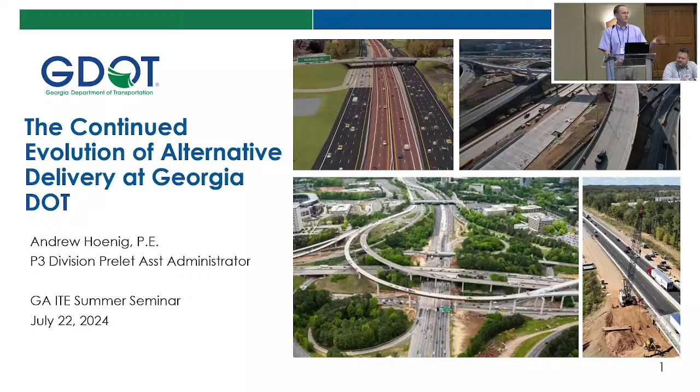But really, so it's time to start looking at what we have coming up after that, right? About after Major Mobility, we obviously have Top End still to go, which is a huge project, don't get me wrong, but it is time to start looking at what's next and what's coming after that. So that's what I'm going to talk to you guys about a little bit today.

Again, what we have coming in alternative delivery and where we are now. We just did a little bit of that. So again, I don't want to talk about where we're going before talking about where we've been.

It is really exciting how much we've been able to do via design build and via alternative delivery. So 55 design build projects totaling more than $2 billion is a really great achievement. Our commissioner actually gave a presentation to the board last week, and in part of that presentation he mentioned that Illinois DOT just recently passed design build legislation. So it's crazy to think that some other state DOTs haven't even done their first design build project, let alone CMGC or design build finance.

We've been doing design build since 2008, when we did our first project via design build - that was the Keys Interchange. So 16 years of history delivering DB and $2 billion in projects. That $2 billion figure does not include design build finance, so it does not include the 285-400 project or the Northwest Corridor project. So really you could say it's even more than that $2 billion figure by now.

And then in 2024, just this year alone, we're expected to award about $5 billion of P3 division projects. We have the West Interchange project coming out, which is 285 and 20 on the west end - that's a huge project that'll get selected in August. And then the 400 Express Lanes project also to be selected in August. So those obviously make up a majority of that $5 billion.

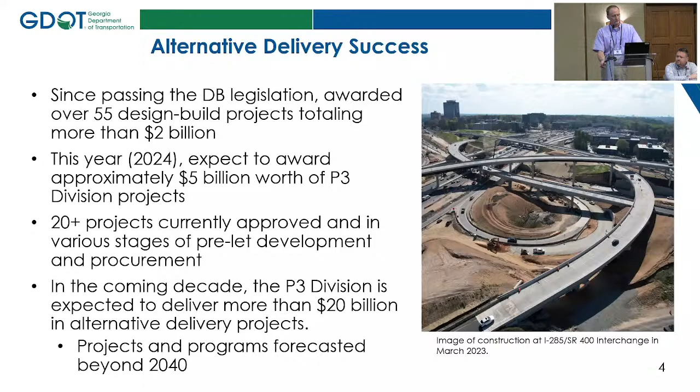So I get this question a lot about what types of alternative delivery projects are coming down the pipe. These are the types of projects we've delivered in the past. In Georgia, we really do design build for all variety of sizes and types of projects.

We've done a maintenance project on I-20 for lighting, about a $1 million lighting project. We've done Safe Routes to Schools projects via design build. So you take that as the small scale, and then we've gone all the way up to design build finance projects.

I think the niche or the projects most well fit for design build is the interchange improvement projects. Those are $100 million projects where you have interstate or limited access facilities, bridges over the interstates or ramps, things that really benefit from more innovation.

The interstate widening project has been really successful to do design build on. The first one was the Forsyth County project where they passed a referendum for $200 million, and we were able to use $63 million of that to deliver 13 miles of widening on 400.

Since that was a really big success, we actually did a variable scope on that project where we had a set dollar figure, and we told the contractors to go as far as you can, get as much widened. We were able to widen 13 miles with that $63 million.

Since that time, we've done a lot of other interstate widening projects. I-85 is a really good example, I-85 phase 1, 2, and 3 via design build.

So Ms. Purcell talked about the $1.5 billion of funding that we just got via the governor's office. That's in addition to our transportation budget, so that's really exciting for the DOT to be able to use some of that money.

So those are the types of projects that we've worked on. I do want to talk about the kind of delivery models that we've used, and new news in that realm.

Initially, the industry was more comfortable with a low bid environment. That's what they'd always done. But more recently, we've been able to do best value projects, and that's really shown a benefit in terms of schedule, aesthetics, or working with local communities. There's lots of other ways to get value out of a project besides low bid.

But the more recent legislation we got approved was the alternative contracting method, the ACM projects, and that was split into 3 categories: CMGC, Preliminary Development Agreement, and Comprehensive Development Agreement. Has everybody heard of CMGC? Do you know what that is? I don't need to explain.

Okay, good, I got a bunch of head nods, so I'll assume yes. So we did award our first CMGC project. Real excited that Ms. Purcell talked about the raising of the Talmadge Bridge in Savannah. That's going really well. It's really cool to see the coordination between the consultant and the contractor working together with a common solution before you even have a construction bid authorized, but those entities working together come up with the best solution.

One thing I do want to be clear on, ACM legislation is very limited in Georgia. Right now it's 7 projects over a 10-year time frame. So we don't anticipate using ACM for too many projects, but it is a tool in the toolbox when you have a complicated situation, like raising the Talmadge Bridge, that had never been done before. It's a good opportunity to use CMGC.

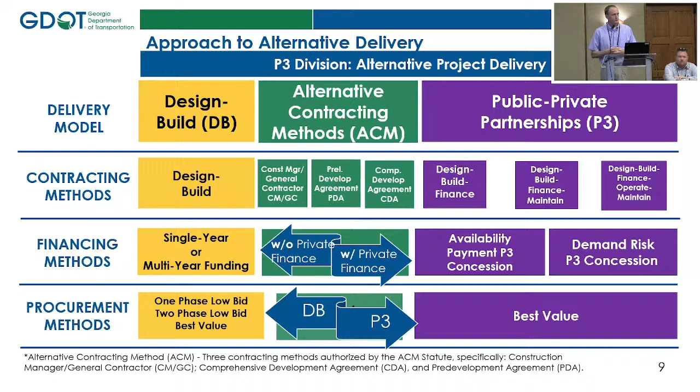So I wanted to show you the new reorganization. I've gotten questions today about what our changes are, because I used to be on the construction side of things. I've now moved to the pre-let side of things, so I'm the pre-let assistant administrator. Real excited about the opportunity to be back on the pre-let side. But besides where I am now, it's really a growth of our division.

For example, Kelvin Mullins was the District 1 engineer. I see Jason Dykes was in the room, so, because Kelvin came to our division. But on top of Kelvin, we also have Helen Pinkston Pope. She was in GDOT Legal, and we coordinate with her a lot. She was kind of our #1 SME in the legal office. Now she's in our division.

And similarly with Michelle Pate, she was in design policy and support, and she's now been brought over to our division. We're really growing our division, and this is intentional, to get more GDOT engaged leadership on these projects. I'll highlight the post-let side of things, because Kelvin is also hiring more project managers to work in the post-let side, to really grow that engaged GDOT leadership in the post-let environment. We had gotten to the point where we couldn't manage all the projects with the small amount of people we had, so we're really growing the division and being more focused on projects.

And then Chandri Brown is also joining our division. She was in program delivery, the Office of Program Delivery, so now she's my counterpart on the pre-let side of things.

And the other thing I wanted to touch on today, did everybody know that we did a design build finance survey? Show of hands. I know some of you, I work with all of y'all. That's good.

We did do a design build finance survey recently. I think it went out in April, and the deadline was June. We were really trying to get feedback from the industry about what we're doing right and how we can be more efficient. We sent that out through ACEC and through Georgia Highway Contractors Association and got a lot of great feedback. We really do value the feedback we receive from the industry. If you ever have anything that is not going well on a design build finance or design build project, feel free to reach out.

So I wanted to talk a little bit about the survey results we got, because it is good feedback. We received 40 individual responses from the industry, varied from consultants and contractors, varied in terms of experienced and non-experienced. I was pretty happy with the 40, and I was really happy with that being the number of people that responded, not the responses themselves, so they varied all over the place.

They were focused on sort of six areas that I'll touch on: streamline procurement approach and evaluation criteria. I touched on the best value selection criteria, but it was really good to see the industry has really grown in Georgia, grown from a low bid approach to a best value approach. A lot of the feedback we got was to increase the evaluation criteria, increase the scoring on the technical side of things, rather than the price. That was really good feedback to have.

And then upcoming opportunities. I mentioned the 400 Express Lane and the I-285 West Interchange project. Those are the DBF projects hopefully selected in August and then awarded later this year. Broadband OMC I touched on, NEVI that Christina will touch on, and then I-75 CVL is the next MMIP project still in the works to be delivered.

Christina has served at the Georgia Department of Transportation for 11 years and is currently the Assistant State Traffic Engineer. She manages GDOT's active traffic management components for Georgia's freeways, including TMC operations and the ITS infrastructure. She previously served as the District 6 Traffic Engineer, as said earlier. She graduated from Georgia Tech with a bachelor's and master's degree in civil engineering. Christina.

So like Andrew said, I will be presenting on Georgia's National Electric Vehicle Infrastructure Deployment Program. This goes through the agenda we're going to talk about. We'll give an overview of the program, talk about our contracting approach. We have 2 rounds of procurement we've done so far or that we're working on, so I'll talk about those, and then we'll talk about some project resources you can access for round 2.

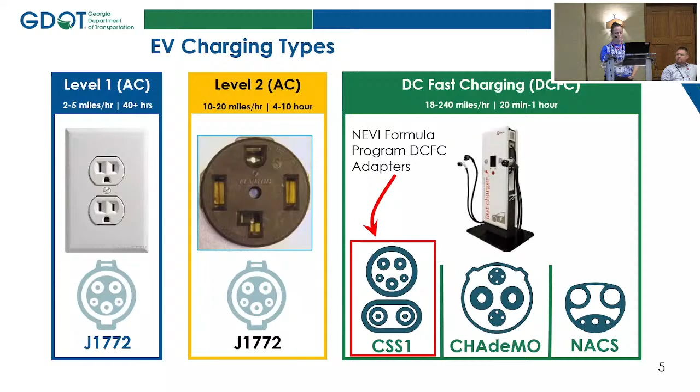So just to go through some more of the requirements for the projects themselves: it's an 80-20 split of federal funding. The federal funding covers 80% of the project, and then the developer covers the rest of the cost of the project.

The chargers are required to have a 97% uptime, and they have to be available 24/7. Essentially, when people stop to charge, we want them to be able to charge. We don't want a situation in which you stop at a convenient location along your route and it's broken - that wouldn't do any good. So there are requirements for availability.

As far as location, they have to be located every 50 miles along an AFC, and they have to be located less than a mile from the corridor. I'll show you a map of the AFCs a little bit later in this presentation, but for the purposes of Georgia, it's mainly interstates and then a few state routes. So if you're traveling along that route, you don't have to drive 5 miles to charge your car - it'll be within a mile of the corridor.

I've gotten some questions previously - there are some other requirements for location. So if at the end of a corridor, you have to have a charger located within 25 miles of the end of the corridor. If the end of the corridor is in your state, it's got to be within 25 miles of that. If it crosses state lines, then it needs to be within 25 miles of the border if the adjacent state does not have that same AFC. If they do, then you just have to meet the 50 miles between the charger and your state versus the next state. That has actually made a bit of a difference to us, because we had to increase the number of chargers we were going to build with round 2 just to make sure we were meeting all those requirements.

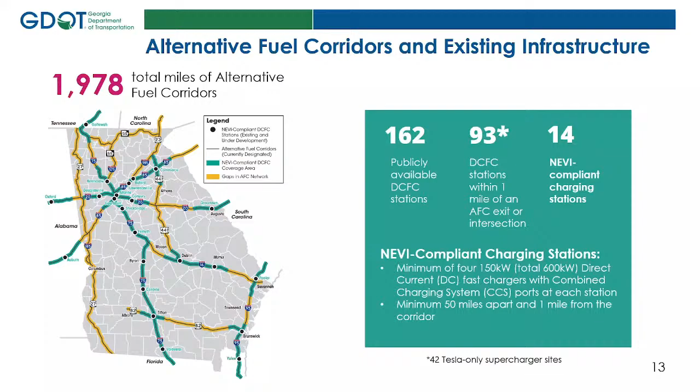Additionally, there are also 42 Tesla-only supercharger sites, but again, to be NEVI compliant, you have to have CCS connectors. So if it's a Tesla-only supercharger site, it would not be considered NEVI compliant.

For locations across the AFCs, we looked at different things: traffic as a proxy for potential charger utilization, connections to major cross highways, tourist destinations along the route, is this somewhere people already stop, existing real estate around the interchanges. And then another thing we looked at in the proposals was amenities, including planned and existing additions.

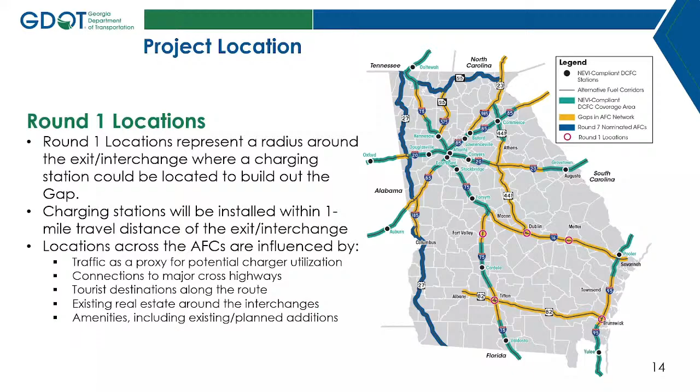So, did they have Wi-Fi? Were there places within walking distance? Were there restrooms? Different things like that played into the selection process.

So for round 1, we have selected the 5 best value proposers. You can see them on the site. EnviroSpark has a location in Tifton and Metter, and then we have Francis Energy in Fort Valley, Silver Comet in Dublin, and then Love's Travel Stop and Country Stores in Brunswick.

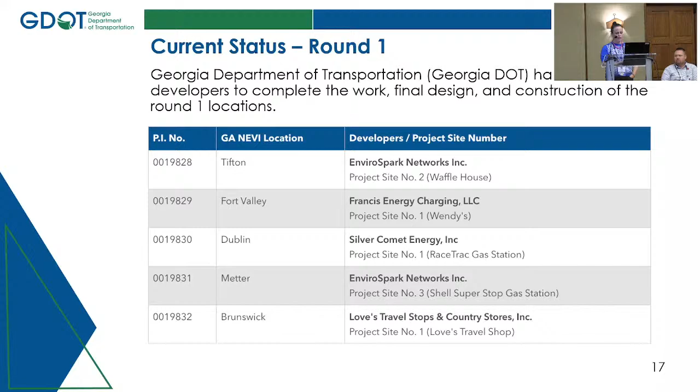I'll run through real quick these different locations. In Tifton, it'll be at a Waffle House. A canopy was another thing we looked at as a potential amenity, but there isn't one proposed here. You can also see on the map next to the aerial image there were 3 other sites proposed in Tifton, but the yellow shows what the selected site was.

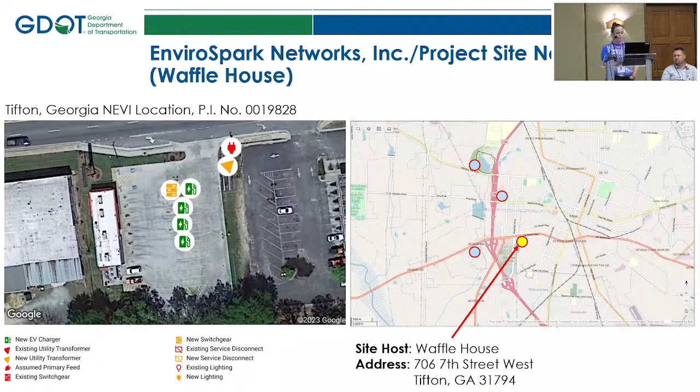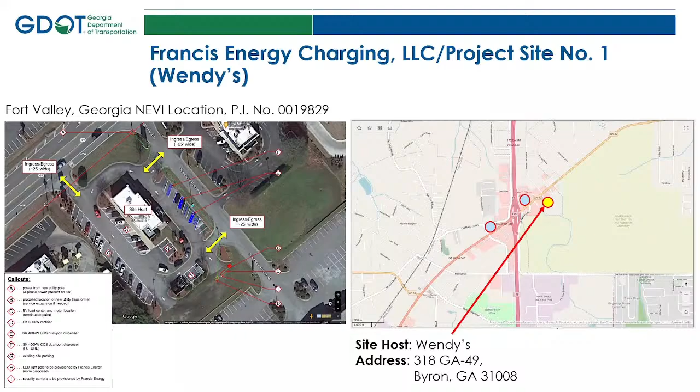Similarly, this is the Fort Valley location. It'll be at a Wendy's. There's no canopy proposed, but the proposer did note that a solar canopy could be installed in the future, so there might be a future upgrade, or there could be.

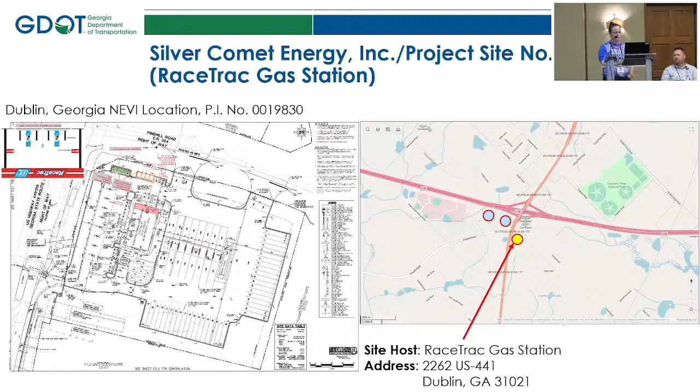This will be at a RaceTrac in Dublin, Silver Comet. They actually are proposing a canopy, and you can see that in their site layout. Unfortunately it's upside down, but you can kind of imagine what that would look like. I've seen those at RaceTracs, so traveling around you may have already seen something that looks like that, but that'll be our Dublin site.

The other EnviroSpark site is in Metter, Georgia. It'll be at the Shell Super Stop gas station, so you can stop there and charge your electric vehicle on your way to summer seminar.

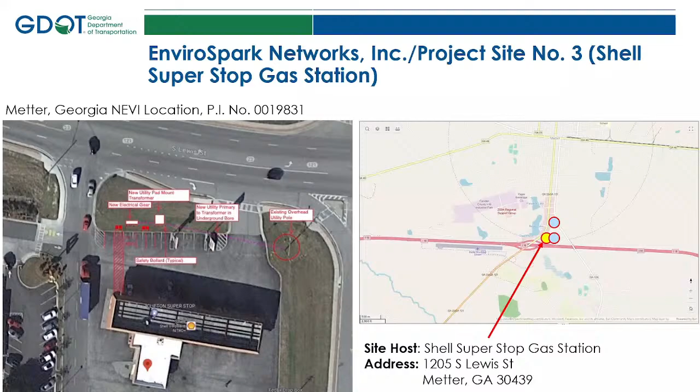And then this is the Love's Travel Stop and Country Stores, which is in Brunswick.

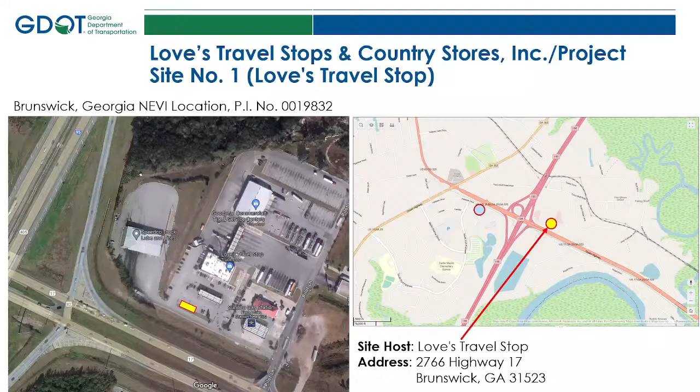And so right now we are in our round 2 procurement. We just released an RFP for that, and it's currently in procurement utilizing Bid Express.

If you want to look at the project information, you can use the QR codes. We recorded an industry forum earlier this year, so you can take a look at that. And then next to that QR code is a QR code that shows round 2 info.

Round 2 identified 33 locations, so it's a lot bigger than round 1. But round 1 was really our first, kind of let's learn some lessons, because at GDOT we've never done a project like this. We've never built electric vehicle chargers. So it was really helpful, I feel, to get some lessons learned under our belt before we went for the 33 charging locations.

This is essentially going to build out the rest of our AFCs as they stand now. Once we're done with that, we'll still have NEVI funds available. So it's potential that we could go off the AFCs, or FHWA does rounds of nominations for AFCs, so there is the potential that there could be more AFCs at some point in the future. We don't really know at this point, but for now round 2 will finish out the build of our AFCs.

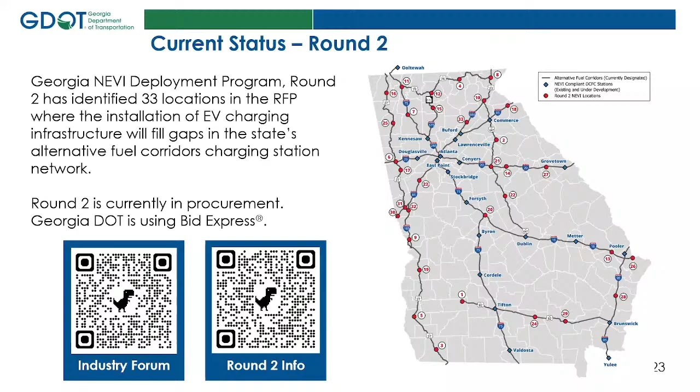We do have a mapping tool that you can look at if you want to see all the gaps that we're filling. You can use the QR code to take a look at it. It's interactive, so there's a lot of information there.

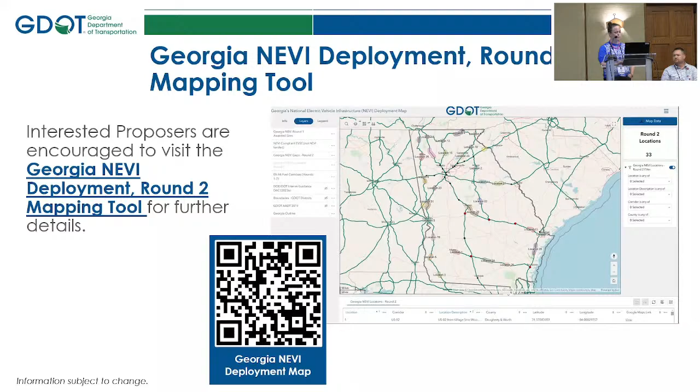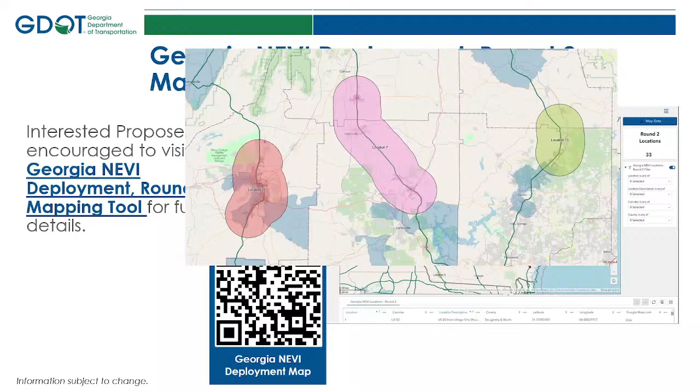This is what the map looks like if you just bring it up. You can see there's little blobs showing you what the locations are, what the gaps are. That's a big overview, but if you zoom in closer, it actually shows you a polygon, and that polygon encompasses every area within 1 mile of the AFC.

You'll notice if you go to the mapping tool, some of the locations have more than one polygon, some might only have one. It just depends what met the distance requirement for the 50 miles, and then also what was available, and then what met the 1 mile from the AFC requirement.

So how many improvements does it take to fix Short Pump? First off, what is Short Pump? It is an area in Henrico County, just outside of Richmond. The county surrounds Richmond to the east, west, and north. Short Pump is a very commercial area, and by far has the most traffic issues, most congestion in the Richmond area. Probably not going to compare to what you might see in Atlanta, but for Richmond, which is a fairly small city, to have this much of an issue just outside of it is pretty problematic.

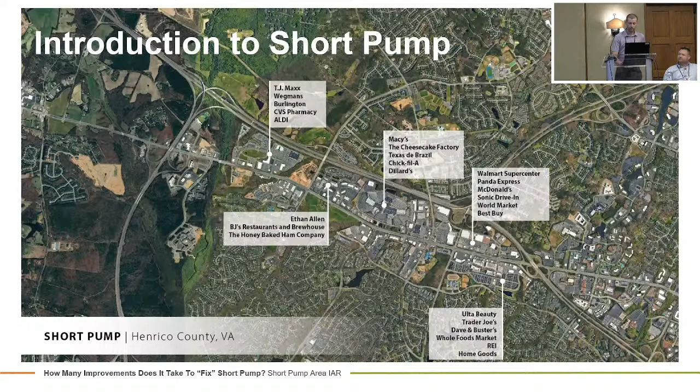One thing that's interesting about Short Pump, and to Henrico County's dismay a little bit, is that it has been studied again and again and again, and there have been fixes, small improvements identified, but nothing to really address the heart of some of the issues. So before I get started, I wanted to outline some of the other studies completed in the area, to give an outline of what's happening there too.

So you have I-64 running east to west throughout the area.

I-295 runs north-south as a bypass route around Richmond. Route 288, while not an interstate, is a freeway that essentially acts as the fourth leg of I-295. But Route 288 and I-295 don't connect, so there's a stretch of I-64 connecting those two other major freeways, and of course I-64 is carrying plenty of traffic itself.

A lot of focus has been placed on the arterial, US 250 throughout the short pump area, which serves all of the businesses I had listed on the previous slide. But there hasn't really been a study in recent years that identified fixes to the problems happening on the interstate. So that became our focus for this study.

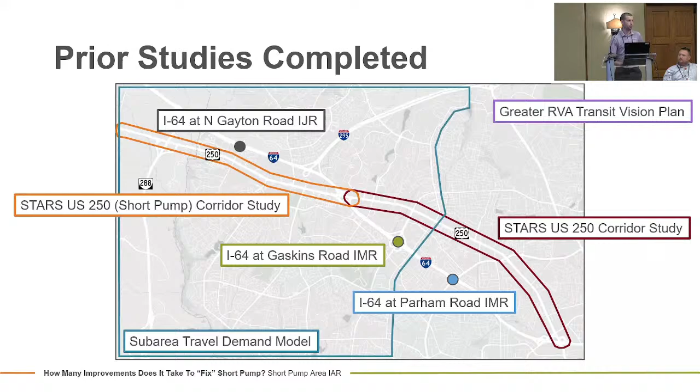This part is kind of par for the course for a lot of studies. What was our goal? We wanted to improve safety at the hot spots, reduce recurring congestion, and address some of the capacity constrained roadways in the area.

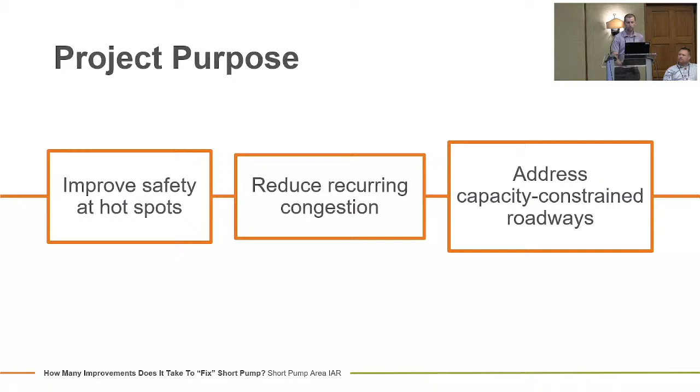One of the things that was interesting about this area is what was happening from a safety perspective. Within 5 years in the short pump area, there were almost 1,900 crashes, including 7 fatal crashes and almost 500 injury crashes. We also had data from the police department showing 9,500 calls for service in this same area, so plenty of instances that did not show up in crash data, likely due to a dollar threshold.

VDOT every year releases a network screening for the entire state that identifies intersections and segments ranked highly for potential safety improvement, which should be evaluated as part of a safety project.

All of those intersections and segments are then ranked within each district. Virginia is split into 9 districts, and short pump had the highest ranked intersection in the Richmond District, also the 9th highest ranked intersection, and 8 segments totaling 2 miles in the top 10. To put that into perspective, Richmond District is, I believe, the largest district in Virginia, with just shy of 10,000 miles of roadway analyzed as part of this network screening. Two of the top 10 in the whole district were right in this area.

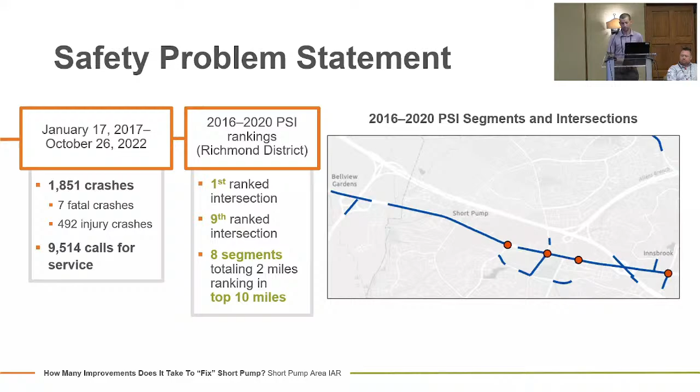A little bit more specifically about what's happening: on westbound I-64 approaching the interchange with US 250, if you're taking what we'll refer to as the westbound to westbound loop ramp to access short pump and all of these businesses, there was a pattern of rear end crashes, 155 crashes over 5 years approaching that loop ramp. Part of it was due to the amount of traffic trying to access the area, and part of it was a fairly short weave within the cloverleaf ramp.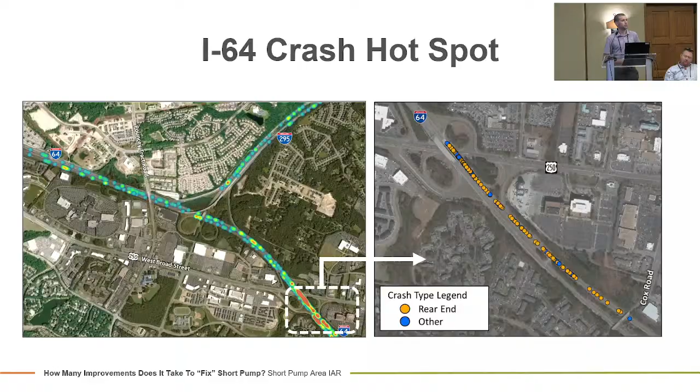But one thing that was interesting, and I'll circle back to this a little bit later, is the timing of these crashes and how densely grouped in the PM peak hour they occurred, much more so than what you would see on average.

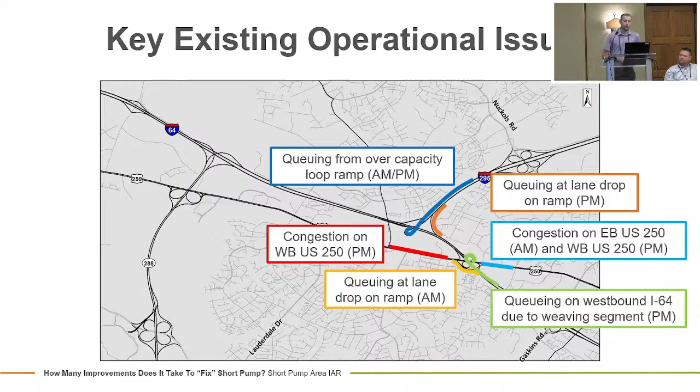In our existing operations analysis, we modeled the entire area, including all 3 freeways - Route 288, I-64, I-295 - plus the entirety of US 250 in between. There were a couple major issues today that were all centered towards the eastern half of our study area.

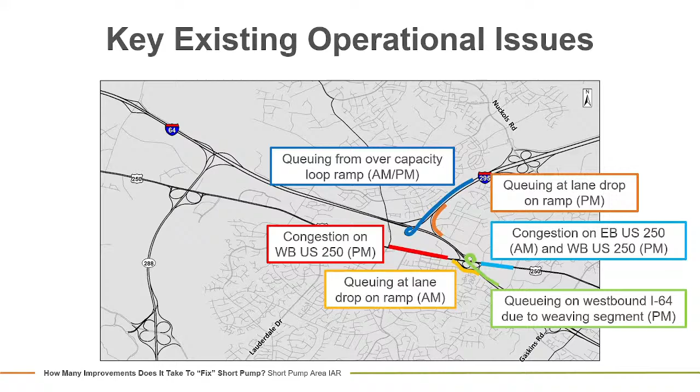Most notably being that queue centered on that westbound 64 to westbound US 250 loop ramp. When we projected that into the future, all of the existing issues just became worse, as you would expect with traffic growth. But then the western half of the study corridor also had some issues start to pop up in our future years.

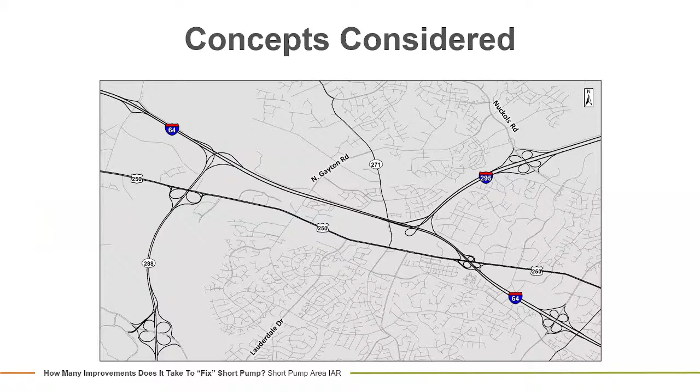So the title of this is How Many Improvements Does It Take to Fix Short Pump? Let me walk you through what we considered, first of all, starting with 3 improvements that had been identified in some of those previous studies that had been done but hadn't yet been funded or constructed. We wanted to include them as part of our efforts.

That was adding auxiliary lanes on Route 288. Part of that was then making necessary improvements on US 250 towards that western half of the corridor, and also installing a through cut, which is an innovative intersection design that has become pretty popular in Virginia, near that interchange with US 250.

So that was the start. We had those efforts pretty much worked through already. We then wanted to really focus on the interchange where we had that safety and congestion issue, so we considered a few different options for innovative interchanges, and we ended up looking at a few different ways of removing that weave and converting this to a partial cloverleaf.

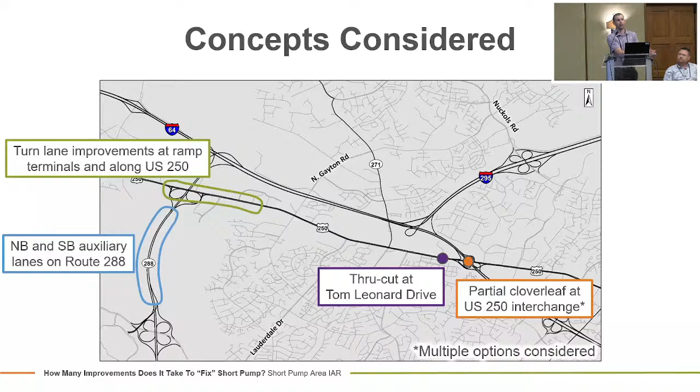However, what we noticed once we were able to free up congestion there and reduce some of that queuing, it just pushes the bottleneck downstream. So then we add in some improvements on I-295, another improvement on the arterial, now that we have volume flowing a little bit better.

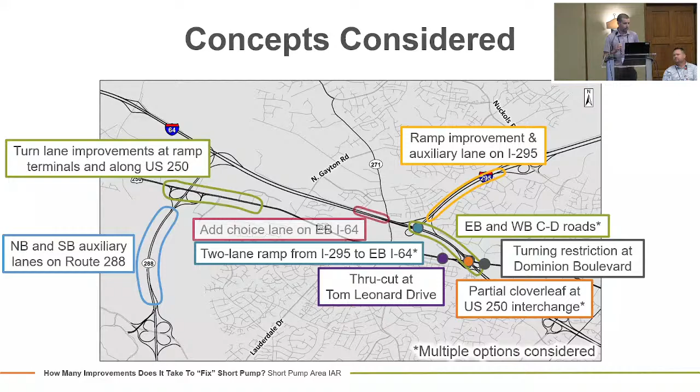Add in a few more options. VDOT and FHWA involved in the project really wanted us to look at options for CD roads. And then we also looked at ways to handle capacity issues on I-295, accessing 64 with a 2-lane ramp. And then a more minor improvement, but just restriping to add a choice lane on I-64.

What I can tell you from this, it's a fairly long list of improvements that we were considering, and these are after we ruled out some improvements earlier on. But I can tell you that it really became a scoping nightmare. For anyone trying to scope projects, we had to look at improvement A. Well, what happens about A plus B, and then A plus B plus C, and then what if we do just A and C together and take out B? So the amount of iterations that we had to run through with the analysis was pretty extensive.

One of the things that Henrico County was very interested in, and this has been in their comprehensive plan for a number of years, was they wanted to look at a new interchange. The challenge with this is they were interested in putting a new interchange between the I-64 interchange with Route 288, which is a freeway-to-freeway interchange, and the I-64 interchange with I-295. So you've got these two major freeway-to-freeway or system-to-system interchanges, and they wanted to put one in the middle.

The spacing was actually okay, but from VDOT's perspective and FHWA's perspective, their biggest worry was, well, can you do this without disrupting that flow from 288 to 295? And then our question to Henrico County is, sure, we could look at this, but we're also looking at all of these other improvements. Where's the value, and how many additional combinations of this new interchange plus these other improvements do we have to consider to be able to tell this story?

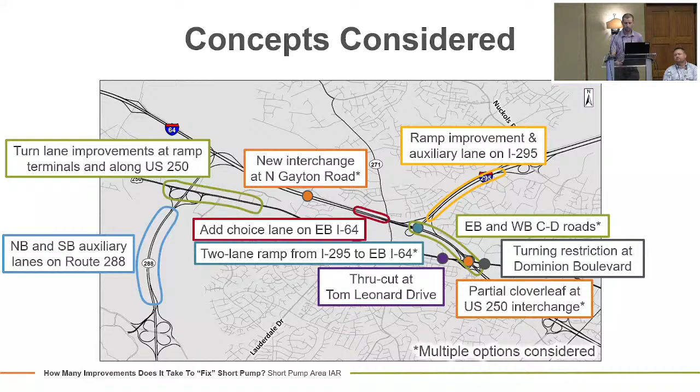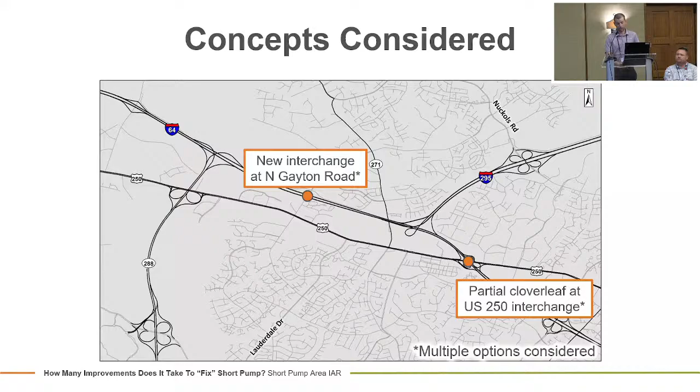So I'm going to focus on these two major improvements that we were evaluating, the partial cloverleaf and then this new interchange, for the rest of my presentation. I'll circle back to the big picture at the end.

So first, again, we looked at a few different options for this partial cloverleaf. The main motivation here was removing that weave on I-64 to try to help reduce the number of crashes that are occurring, and to just be able to push more vehicles through on I-64. So we removed the ramp from eastbound 250 to westbound 64 and instead added a signal with left turns.

When we first looked at that with a traditional partial cloverleaf design, we noticed that we then had queuing issues that were created on US 250 due to the new signal. So one of the changes that we made was to implement a contraflow left turn interchange.

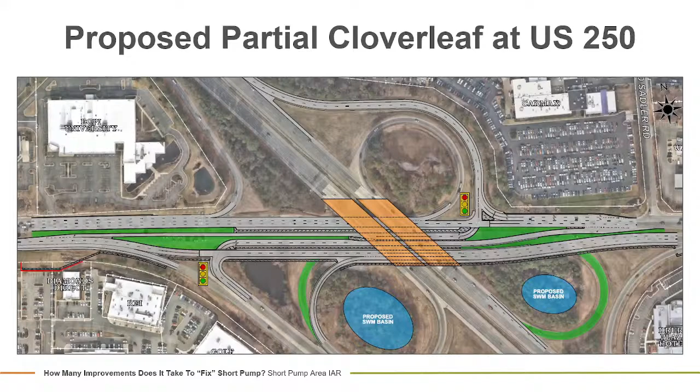So if you look in the middle of this diagram, not quite like a DDI where you don't, just the left turns are crossing. What it did was it allowed us to have more storage in the left turn lane for those vehicles accessing the new signal and turning left, where we were able to alleviate some queuing issues on US 250.

And now if I go back to the potential new interchange at North Gayton, one of the biggest motivating factors for considering this interchange was that it had potential to reroute volume away from the most capacity-constrained roadways or ramps in the area. So what we have shown is the projected change in our peak hour volumes.

So I'll start with that loop ramp that is the kind of basis for our study. In 2046, if we were to implement this new interchange, because it provided new access to Short Pump area, it was projected to take away 600 vehicles from that loop ramp that was over capacity. We were also able to take a lot of volume off of US 250 itself, which had its own safety and congestion related issues.

So the goal here was to make sure, okay, well, we know we're adding a new access point. The goal is to make sure that this area in between these three major interchanges can still operate efficiently on I-64, and can we mitigate any potential increases in congestion in that area so that we can see the benefit of reduced volume on these other roadways.

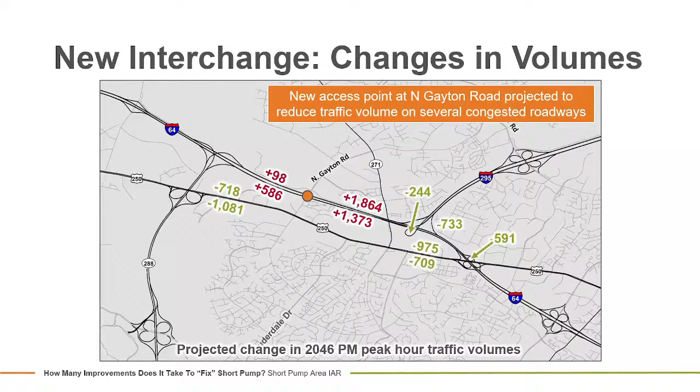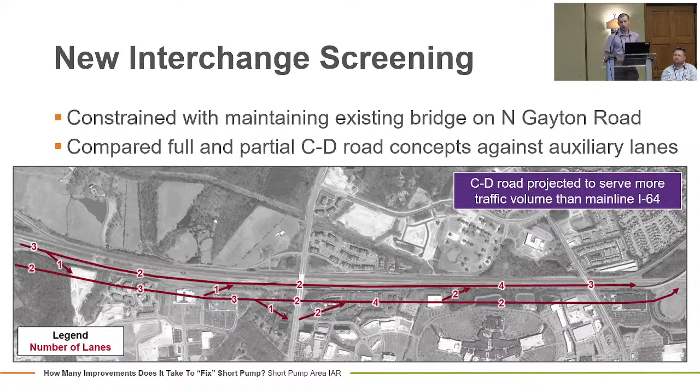I mentioned earlier that VDOT and Federal Highway were very interested in seeing concepts related to CD roads. So with the new interchange, the question was how does this fit in, and can it be a system of CD roads? The concept shown here was the least desirable from VDOT and FHWA's perspective, and this was our smallest CD road concept, where we were carrying 3 or 4 lanes throughout the CD road to accommodate traffic, since traffic going from Route 288 to I-295, or through either of those interchanges, was on the CD road.

This created some issues related to access in and out, based on the number of ingress and egress points to the CD road. On the other option we looked at, we actually needed 5 lanes on the CD road at one point to accommodate the amount of traffic it would be serving.

After a couple of redesigns of the CD road, we were able to determine that the CD road could operate as efficiently as the other option we were looking at, which was just auxiliary lanes connecting the two existing interchanges to our proposed interchange. Both operated fairly well and did not have any degradation in speed compared to our existing scenario.

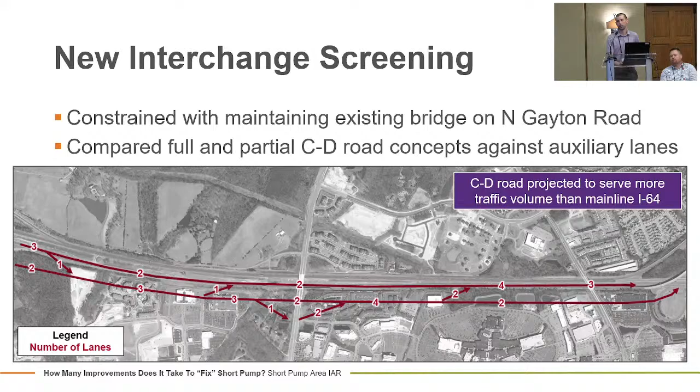So one question was, for this new interchange, how do we connect it to the two major interchanges on either side? The other was what interchange alternative to use, where Henrico's main goal was to maintain the existing bridge. So what we came up with was a DDI at North Gayton Road with those auxiliary lanes connecting this interchange again to the major interchanges on either side.

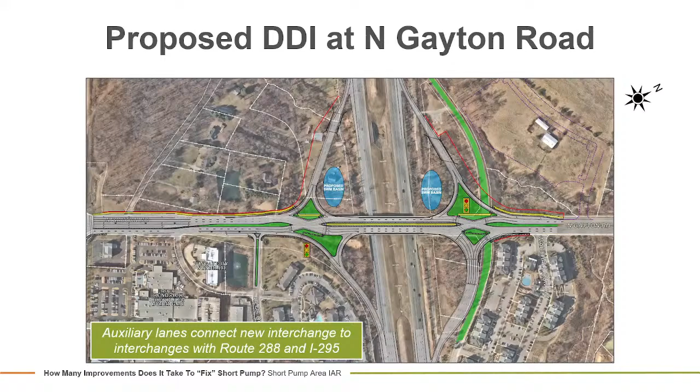To wrap this up and put it in a way we could effectively compare these various alternatives across the board, we ended up developing what we were calling build packages. So there were 3 build packages, where the major difference was: build package 1 included our cloverleaf at US 250, build package 2 included the new interchange at North Gayton Road, and build package 3 included both major improvements.

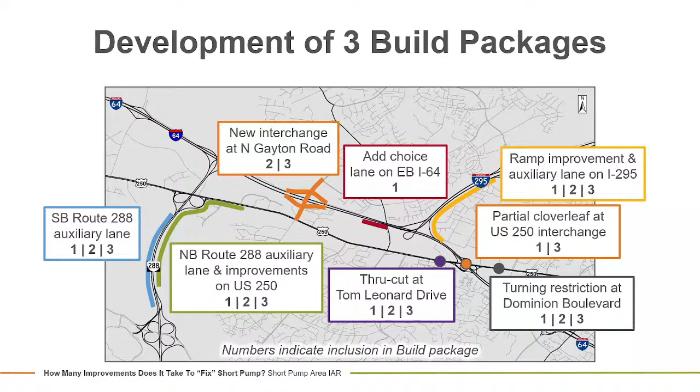The other improvements, I say minor, but when I show you costs in a bit, the minor ones really aren't so minor either. These other improvements were included in all 3 build packages, with the exception of one, which was restriping for the choice lane, which was not needed once we added the new interchange and auxiliary lanes.

So what did this do to the area? Our build packages, all 3, were projected to reduce travel time on westbound I-64 in the 2046 PM peak hour by over 15 minutes compared to our no-build scenario. All showed vast improvement over no-build, so there was plenty of utility. But we found that build packages 2 and 3, which included the new interchange, improved travel time even more, because so many more vehicles were now through vehicles at that interchange with I-64 or US 250, as opposed to exiting and being caught in that weave.

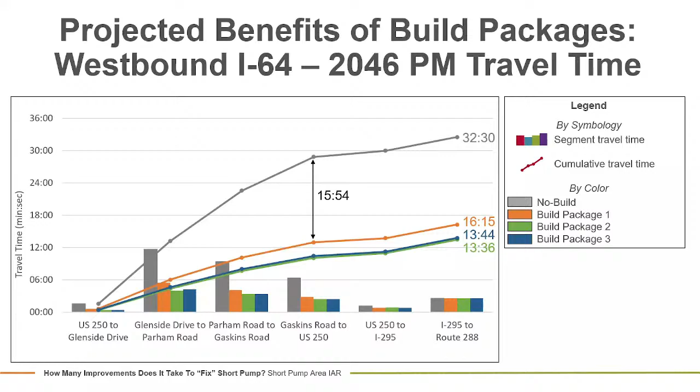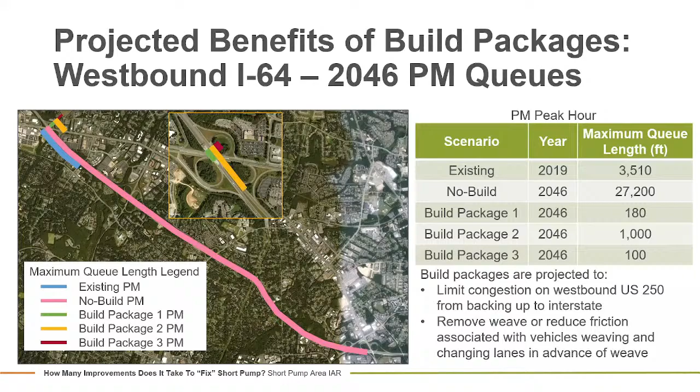What will be the only real technical part of this presentation is our biggest challenge, which was trying to document the potential benefits to safety. I don't know who here has worked on predictive analyses with Highway Safety Manual-based methods, but I will be the first to tell you I cannot wait for the new version of the Highway Safety Manual.

Because every project I've worked on using predictive methods for interstates, there's always some limitation where it can't truly analyze the scenario you're working on. Our goal, specifically with the packages that included the new interchange, was to identify the potential increase in crashes predicted due to new signals, new ramps, and new auxiliary lanes connected to this interchange. You're introducing a new conflict point, and with that comes crashes.

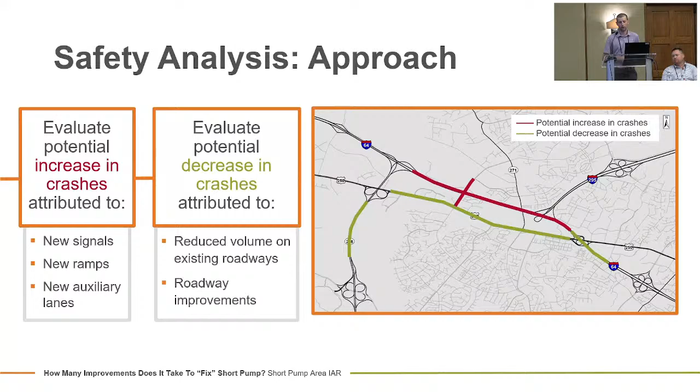We needed to compare that to the potential crash reductions we would see elsewhere in the network, since we are removing volume from some of those overcapacity roadways.

Now, the issue we were running into: we were using ISATe, the Enhanced Interchange Safety Analysis Tool. It does not accurately predict the number of congestion-related crashes that we were seeing at the US 250 interchange. And you might say, okay, you just need to calibrate the model.

The problem was, elsewhere in our study network, if you took away this 3,000 feet where we had this existing crash problem, the tool was predicting crashes within 12% of our existing crash history everywhere else. So it was actually doing fairly well, except for this area with the congestion-related crash problem, where it was predicting almost 80% fewer crashes than what we were seeing in the field.

Also, when we plugged in our build models, it not only was way under-predicting, but it predicted there would be an increase in crashes when we constructed the partial cloverleaf or rerouted some of these vehicles. That was pretty contrary to what we'd expect, given a clear pattern of rear-end crashes caused by congestion in the PM peak hour. If we remove that congestion, how are we now increasing crashes?

To put a little context to those crashes: I think it was something like 90% rear-end crashes over 5 years. Almost 60% of them occurred from 3 to 7 p.m., which was about 15 to 20% higher than the average urban interstate in Virginia. And close to a quarter of the crashes happened in just one hour, between 5 and 6 p.m.

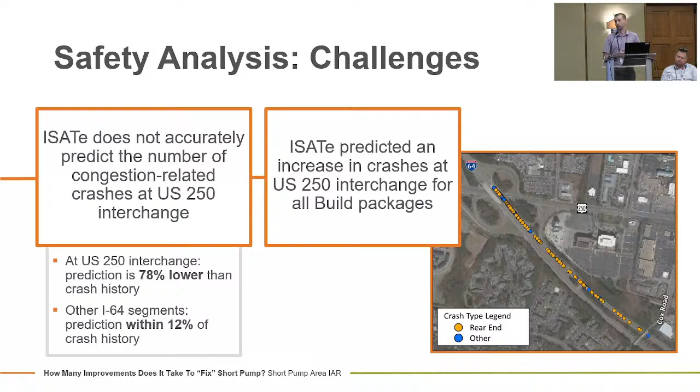So given that we had some issues with our methodology, we had to come up with alternative approaches. We ended up developing crash reductions and custom CMFs to try to understand how many crashes we could potentially reduce.

The low range approach—and I'll say it's not perfect, but it's one the state has started to adopt for Smart Scale, which, if anyone is familiar, is a program in Virginia used to fund transportation projects. It goes through a scoring process where every other year there are somewhere between 300 and 500 applications submitted, scored based on a number of factors, with safety and potential crash reduction being one of them.

Given that this process has to score 300 to 500 projects in a short time frame, it has some base assumptions built in for estimating crash reduction. This low range CMF option was similar to something used in Smart Scale, where we look at the potential change in volume from an improvement and tie that to a potential change in crashes. Very simply put, if you remove 10% of your vehicles, you can assume a 10% reduction in crashes as well.

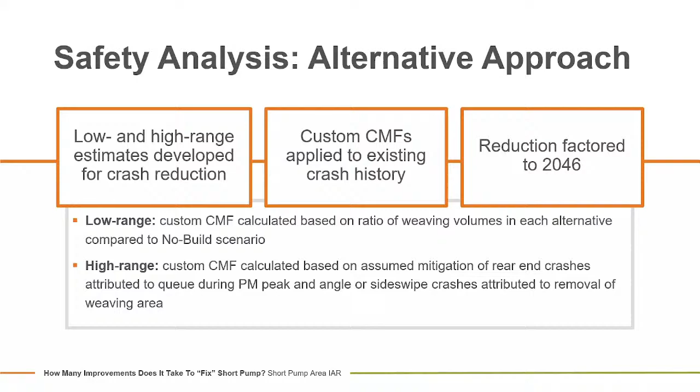So overall summary, we knew with the new interchange that we were likely to see an increase in crashes on 64 in the vicinity of the new interchange. But we were able to balance that out with reductions in crashes on US 250 due to a lot of volume being rerouted to the interstate, and reductions at that US 250 interchange due to our reduction in congestion.

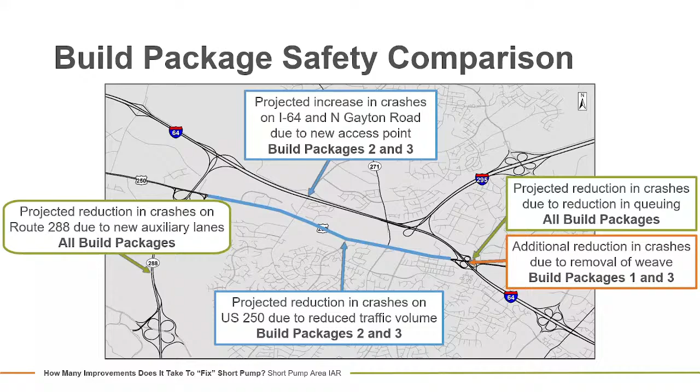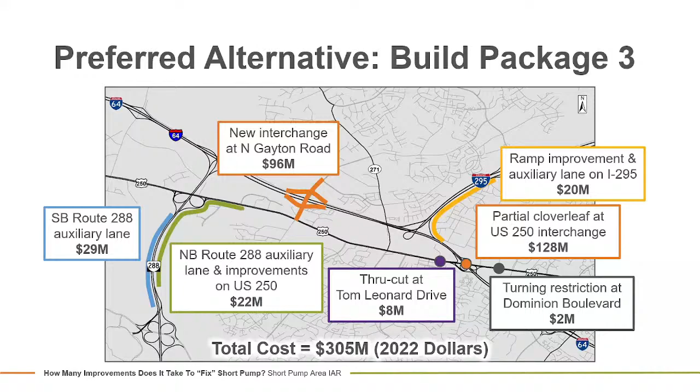So how much money does it take to fix Short Pump? Right now, it's looking at $305 million in 2022 dollars. So Henrico County has got their work cut out for them to try to fund all of these improvements. They have made some progress already. So kind of an update as to where things stand now.

The new interchange and the partial cloverleaf at US 250 both were included in our preferred alternative and approved by VDOT and Federal Highway. So those are both taking the next step of undergoing a NEPA study.

Henrico has already acquired almost $65 million in funding from Central Virginia Transportation Authority, $60 million in local funding, and $23 million in previously funded smart scale projects, so some of the ones that were identified and still included in our recommendations. And they have a few grant applications out there today trying to acquire the rest of the money.

With that, thank you.